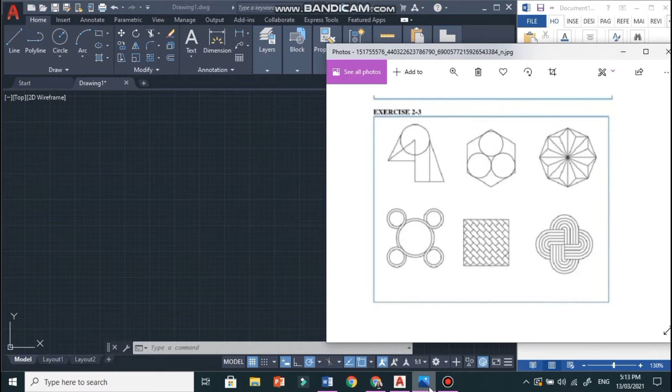As you can see from the right side of the screen, these are the 6 figures that we will be making today. I also have here a guide manual at the right side of my screen.

So to start with, let's first create a rectangle or a box to make our drawing easier. Click polygon, or just type in the command box 'poly', specify the side and enter. Then click anywhere in the drawing area, then click circumscribe about circle, and then type 10 for its size.

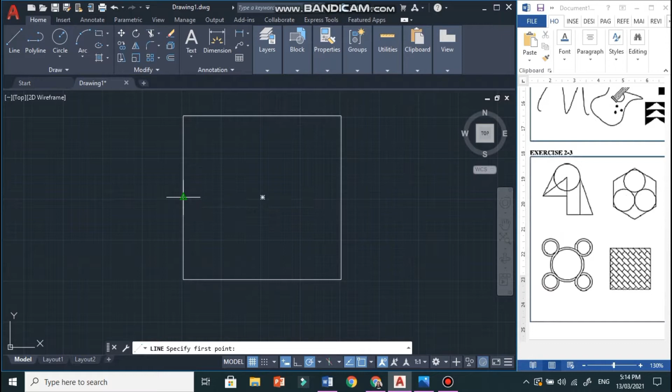So here is our first figure. To start with, let's click the line, then the midpoint. For the second one, click the circle, specifically the 2-point circle, and then click from midpoint to midpoint.

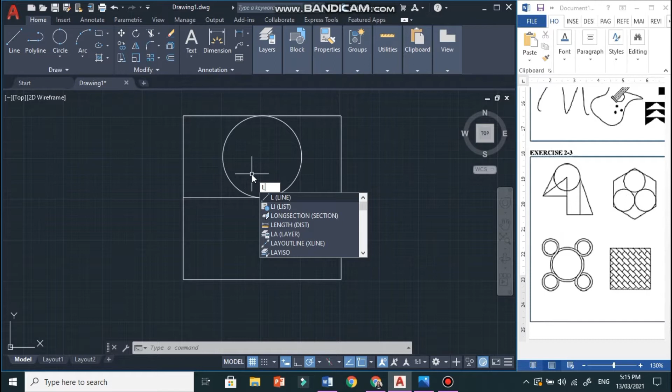For the next one, click the line or just type L, then specify the first point at the center of the circle and then to its midpoint. For the third one, again type L in the command bar, click here, specify the first point and then the second point.

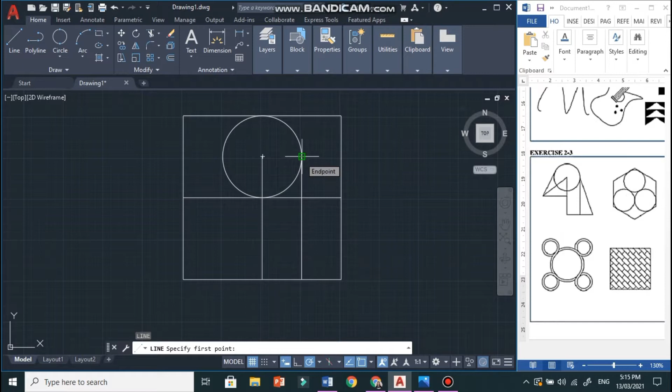For the third one, we again type L, then click at the end point and the other end point.

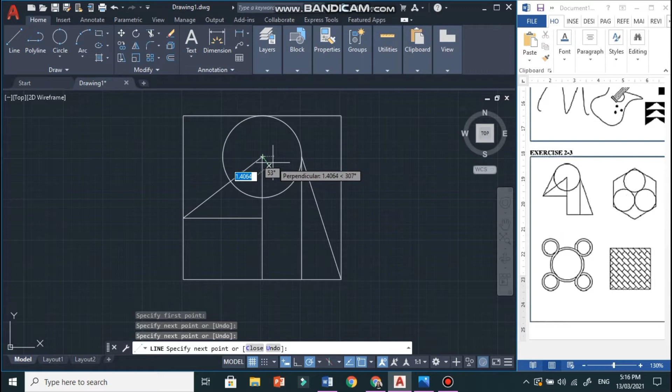For this line, you can first erase it. Type erase or just right click then click erase, then again click the line at the midpoint, then you can connect it to the center of the circle. For the last line, again click the line or type L, then click the endpoint to its tangent.

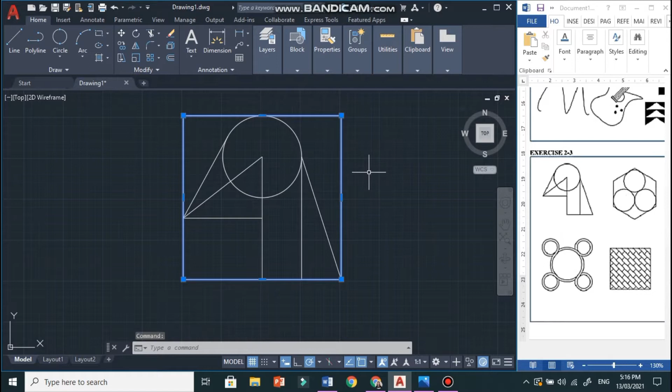Then for the next one, let's trim or erase the unnecessary lines. And for the last one, just click the line again, then click the endpoint to the other end. So there you go, we have our first figure.

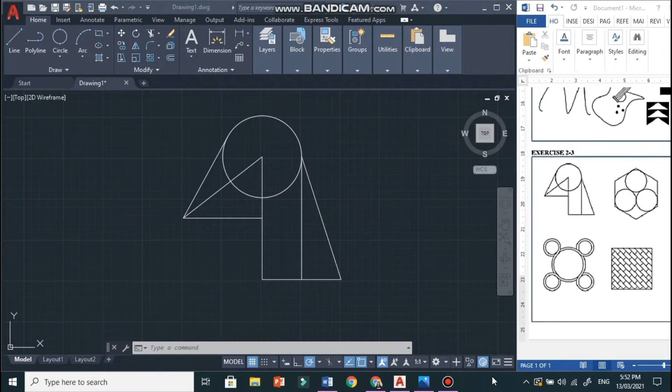Let's proceed to our second figure. Again we need to make a rectangle. Just click or type polygon in our command bar, then for its side type 4, and then click here.

To make just 3 circles, first click the line or type L, then make diagonal lines here, then another diagonal line. To make our first circle, click circle, specifically the tangent, and then specify the first point here. So we have our first circle.

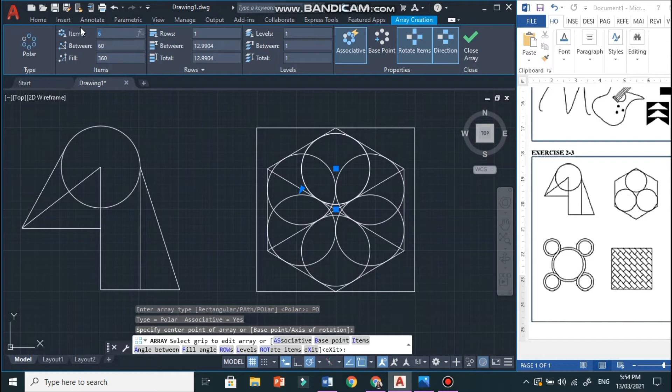For the next one, click the first circle and then type array at the command bar, enter, then click polar and specify the center, or just click at the midpoint. For the items, type 3, so we have 3 circles. Enter.

For the last one, just remove the unnecessary lines. Click the lines and then type erase. There you go, we have our second figure.

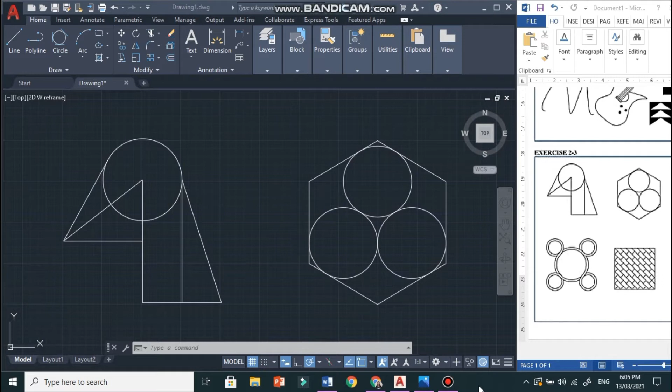Now we can proceed to our third figure. So here is our third figure, this flowery light drawing. Then we can just move our drawing area using the pan.

To start with, again let's create a square. Just type polygon, enter, then enter the number of sides, which is 4. Specify the center of polygon, or it can be here, then click circumscribe about circle, and for its radius type 10. So now we have a square here.

So first we have to make an octagon shape. To do that, again type polygon, it has 8 sides so type 8, then specify the center of polygon, which is at the geometric center. Then click inscribe in circle, and click at the midpoint of the box.

For the next one, to create those lines, you need to type L for the line, then click at the midpoint here, here. For the next one, again type line or L, then from the midpoint to the other midpoint. Then again type L at the midpoint again.

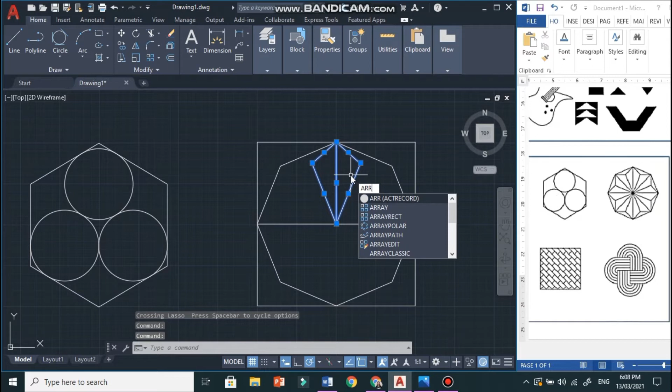So to create the other triangle-like lines, you just need to highlight this 3. Then type in the command bar array, polar, and then specify the center point, which is at the midpoint. And then we will be needing 1, 2, 3, 4, 5, 6, 7, 8. So just type in the items 8.

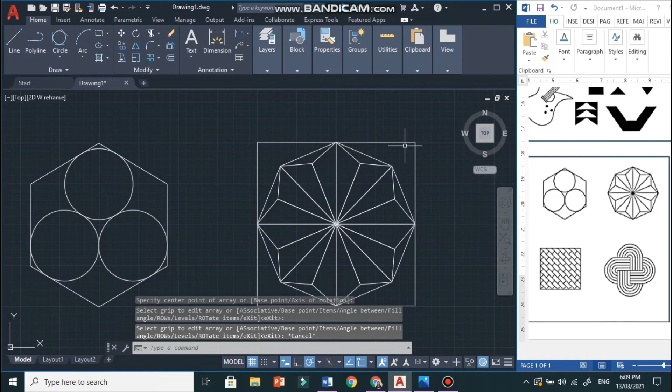So for the last step, you just need to erase this one. And then here, we have our third figure. We can now proceed with our fourth figure.

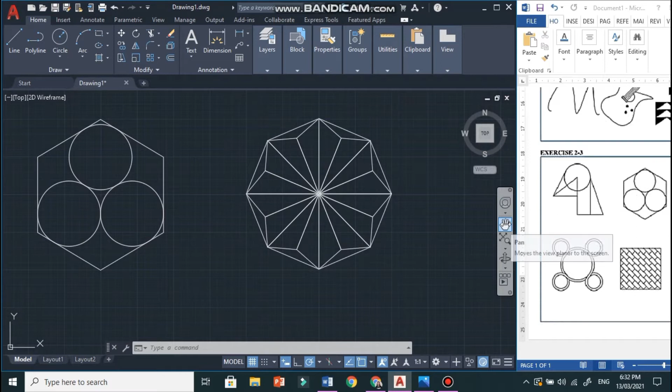So for our fourth figure, here is the drawing. First, let's move our drawing area using the pan. And then again, let's create a square. Just type polygon, and then enter the number of sides, 4. Specify the center of polygon here. Click circumscribe about circle. Then 10 will be the radius.

And then let's create this big circle. Just click the circle, specify the center point, then click the midpoint. And then you can remove this excess or unnecessary line. Just type erase.

And then for the next one, click again the circle, then type offset. And then input 1. So for the next one, create a line here to here at 135 degrees.

And then to create those smaller circles, again, click the circle, and then just type 3. Then again, use the offset, and 1. So again, create a line here, just for the center, at 45 degrees.

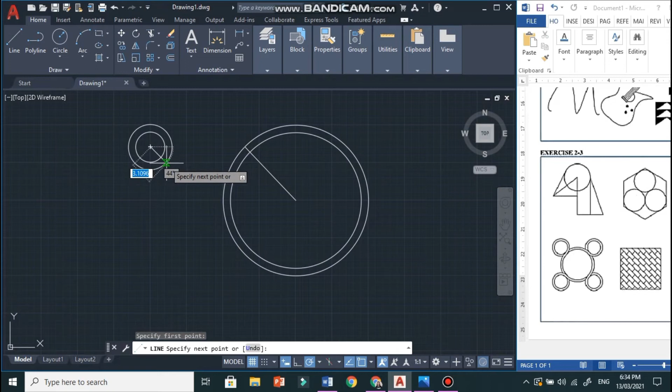Then after that, let's connect this line, this circle. Connect it here. And then you can trim first and remove those excess lines.

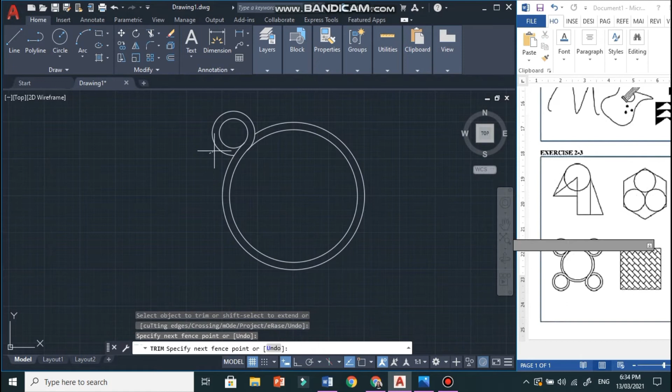And then type at the command bar. Then trim this one and this one. So to have our second, third, and fourth circles, small circles, you can again highlight this. Okay, don't forget to click it.

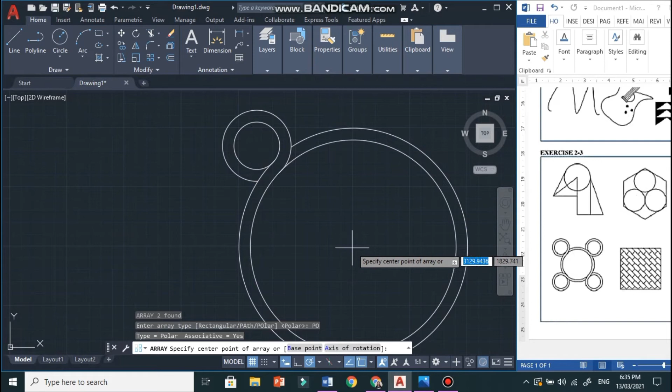So highlight first this circle, or click here, and then type at the command bar AR. Click the polar, specify the center or click at the midpoint, and then for the items, click 4. So we can have 4 smaller circles.

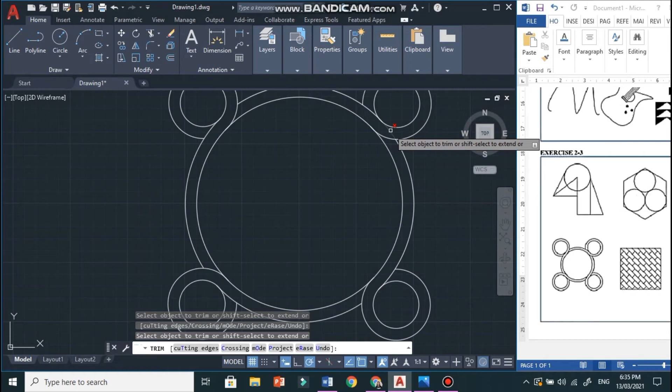And then for the last one would be trimming those unnecessary lines or those excess lines. Just type again at the command bar trim, and then let's trim this one, then this one, and last one. So there we go, we have our fourth figure.

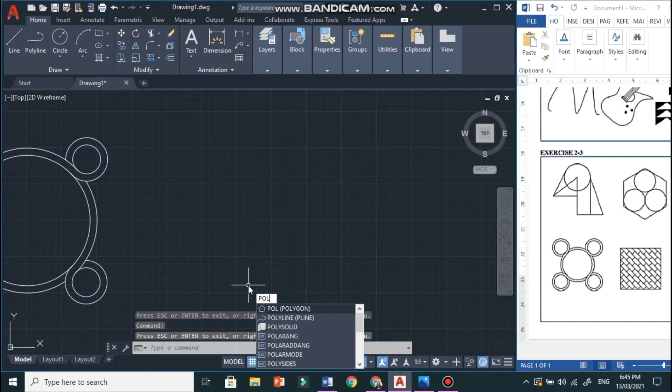Let's draw our fifth figure. So this is our fifth figure. Again, move the drawing area using the pan. Again, type polygon. Now we will be creating a smaller square. So for the number of sides, then specify the center of polygon. So it can be here or anywhere inside the drawing area. Then click the circumscribe about circle. So before our radius was 10, now our radius would be 5.

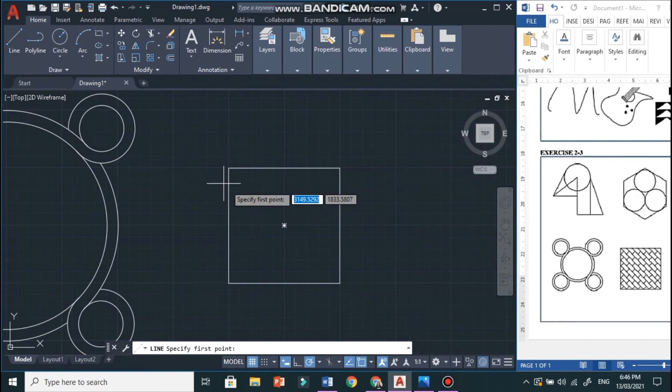So first, we need to create lines to make this figure. Click the L or type L for the line, and then click at the end point here to here. And then to create multiple lines, just click this line and then type at the command bar offset. Enter. Specify the distance, it should be 4. And then click multiple or just type M. And then click here multiple times. 7.

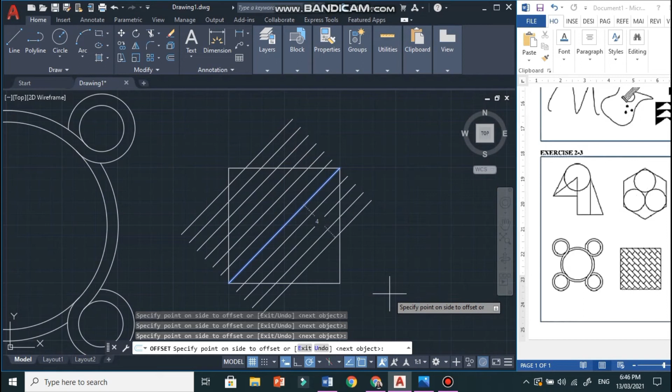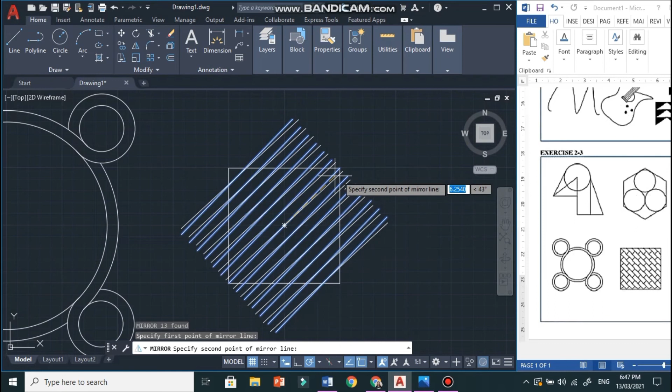And then 1, 2, 3, then escape. And then for the next one, we need to click this line and then type mirror. So just click or specify the first point of the mirror line. Click here to the midpoint. And then we can just trim this excess lines using, or just type trim at the command bar.

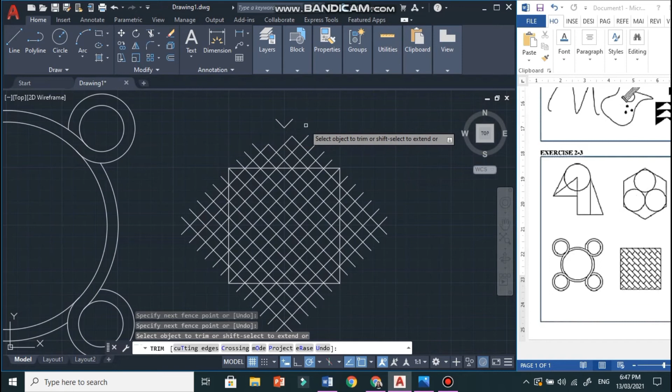So in doing this figure, you just need patience. You need to be patient.

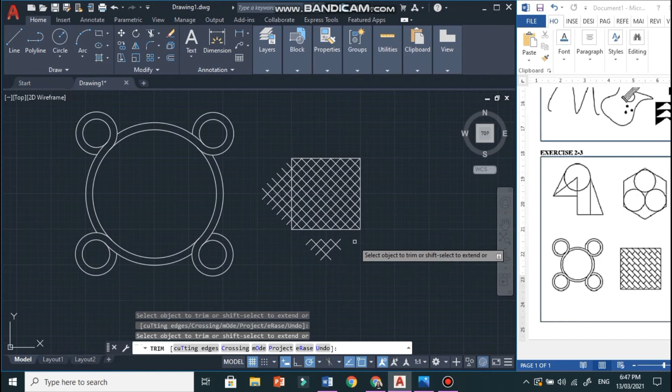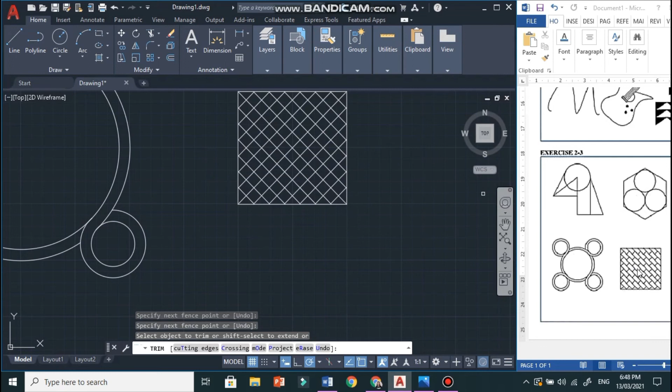And then for the next one, to create this figure, you need again to trim those excess lines inside the stuff. Then type at the command bar trim. And here.

You need to be very extra careful with this one.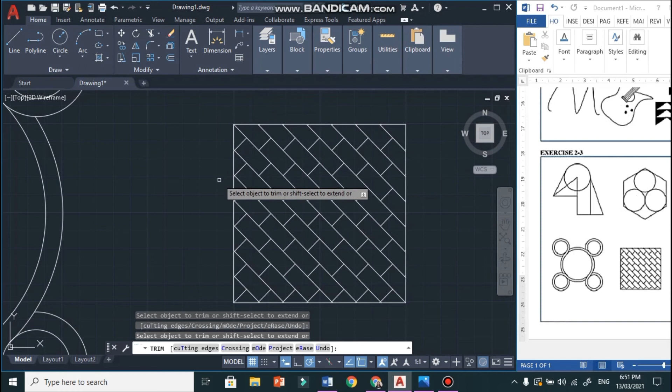And now let's draw our last figure. So this is our sixth figure. To start with, again, let's make a square. Just type polygon at the command bar. Type polygon, enter. Then specify the number of sides, which is 4, enter. Then let's specify the center of polygon, or just simply click here. And then click the circumscribe about circle. And then type 10, enter.

And then we can now trim this excess line by just typing at the command bar trim. So this is just our guide.

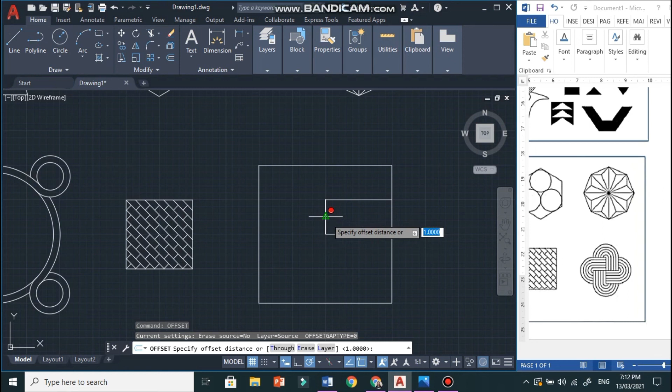And then for the next one, let's create multiple lines in here. So just click this line and then type offset, enter. And then specify the distance, just 1, enter. Click the multiple and create 5 lines, 1, 2, 3, 4, and 5.

So the opposite side, 1, 2, 3, 4, 5. And then you just need to connect this line to here. So just type fillet, enter. So from here to here, sorry, again, enter. Click here, multiple.

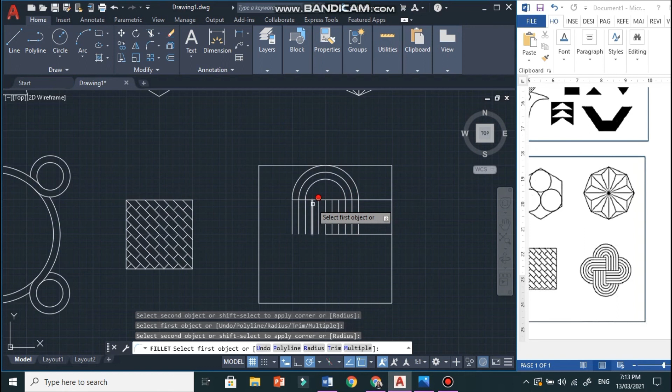Here, here, and there it is. So we can now trim this excess lines or the unnecessary lines by just typing at the command bar trim. Enter. So here and this one, and then also this one.

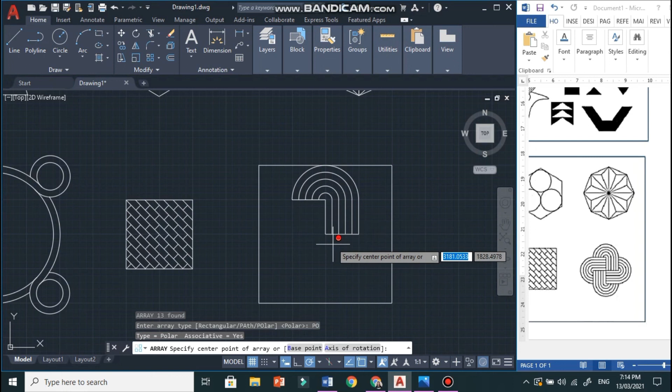There you go. So to make the other lines like this one, you need to highlight or just click those lines and then type AR. Enter. Then polar. Then specify the center point. Yeah, that's it. So this is our last figure.

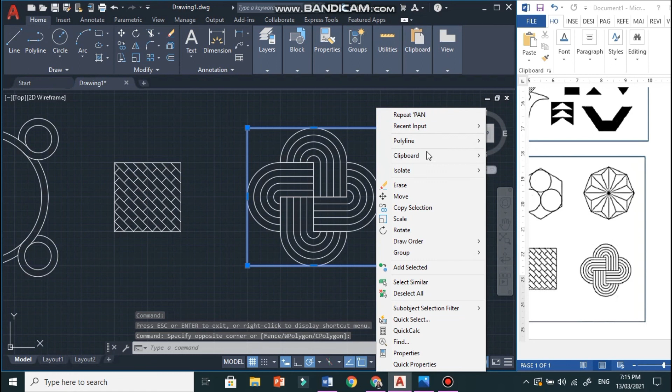Now we need to also remove this box. And then there you go. So this is our figure.